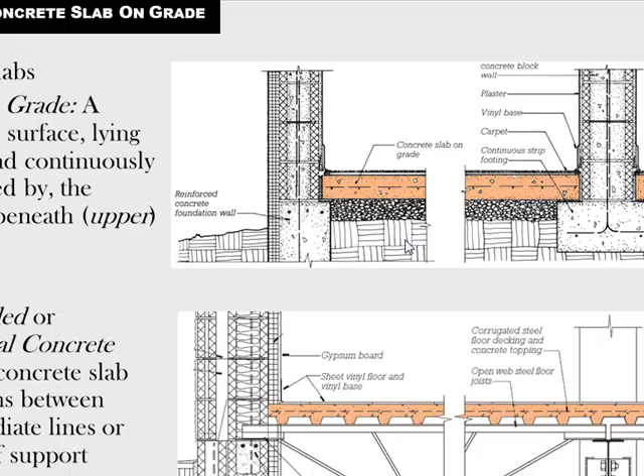We're continuing into concrete. This is talking about concrete slabs on grade, which is pouring the concrete in place. Here's some good details you could copy for extra credit, showing how a slab on grade is made. This is a section detail, meaning it's cutting through the wall vertically down into the ground. In it you see some concrete block here with some reinforcing bars. You have insulation on the outside, and your concrete foundation wall there. This symbol is the dirt or earth, like a parquet pattern. Usually above the earth you will have 4 inches of gravel.

What that does is allow any excess water to drain down away from the slab. Then you have your 4-inch concrete slab on grade that has the welded wire mesh inside, and your flooring on top of that. So this is an exterior foundation wall. This is an interior footing — it's a little shallower, but it supports an interior wall.

There's also suspended structural concrete slabs. This is another detail, probably similar to what we're standing on right here. You have a concrete masonry exterior wall, and some steel trusses holding up this floor. Then you have that corrugated metal concrete deck that you've seen pictures of before, and on that is a lightweight concrete flooring with some welded wire mesh in it. That's held up by a steel beam that's clipped to that column beyond.

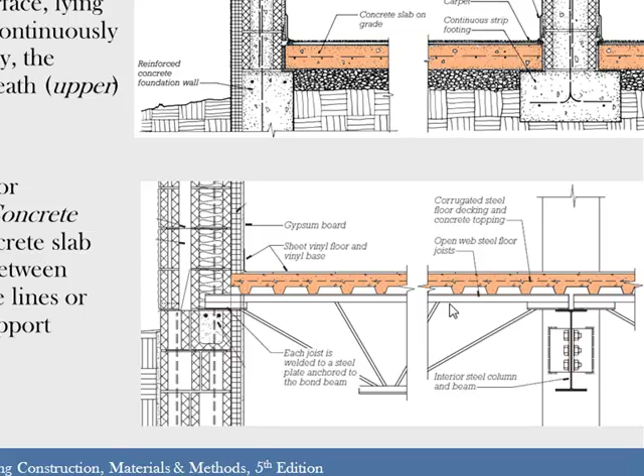The sign-in sheet's up here for those that just came in. So these are good details to study and redraw for extra credit. This slideshow is online, and plus those details are probably in the book.

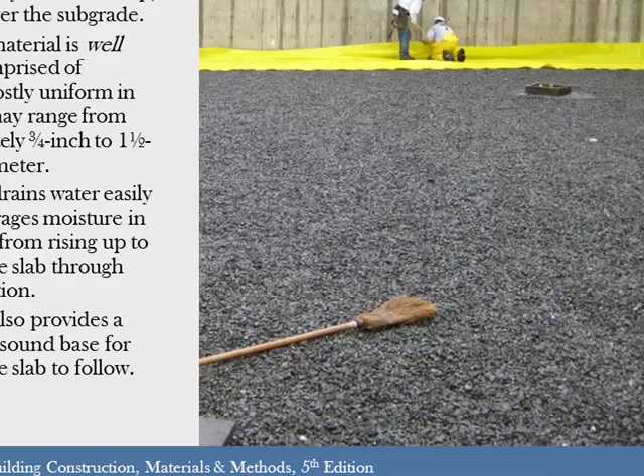So when you pour a slab on grade, you have to really prepare your site well. That's probably one of the most important factors — you actually have to dig out the existing dirt and then put in good dirt that's stable, that won't shrink and swell, then tamp it down and prepare for your concrete. Because if you just go out and pour on whatever's there, there's no telling what's underneath — it'll cave in, or it'll crack, shrink, and swell. So you really have to prepare the subgrade. The engineer will usually test the soil and tell you what you need to add. There's the rock I was just talking about — that's the 4-inch layer of gravel right here.

So there it is right there. Obviously that's a big piece of concrete they're fixing to lay, and there's the waterproofing membrane over there.

When you have edges on your slabs, or if they're running into another wall or building, you have to allow for some movement. So you need expansion joint material, usually some form of foam or rubber. Then on top of it, you'll have a sealant that will keep, hopefully, most stuff from falling down in there.

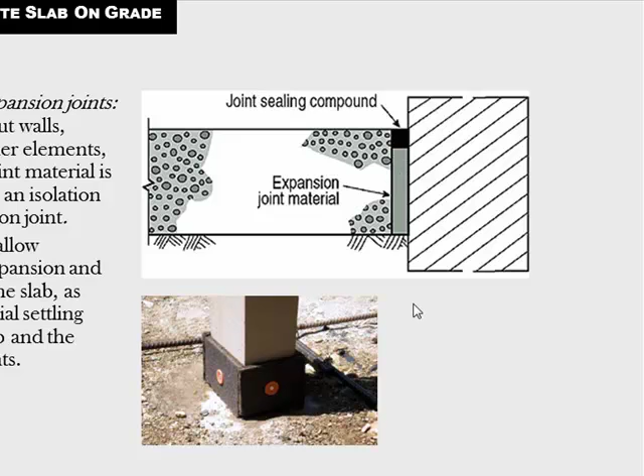You can see that's what it looks like. This is that cut looking down on that column. There's the column, and there's this expansion joint material around it. Then when the concrete's poured, they'll put a sealant over that, which is this right here.

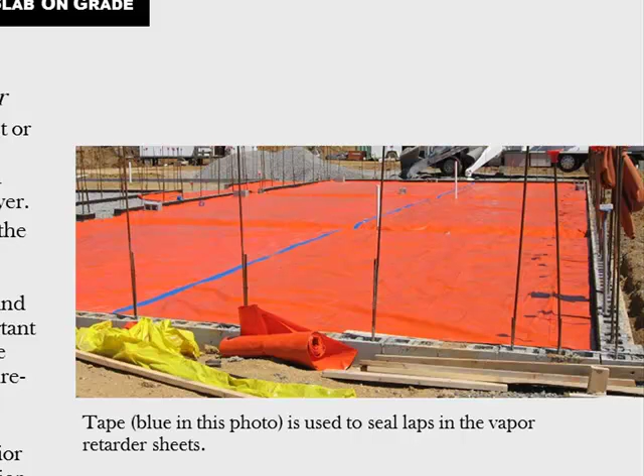Then you have a moisture barrier, which again is just another protection for moisture. It's hard to find pieces of plastic or this material so big, so you have to seal the joints in that, and it's got to be done precisely. Depending on whether it's just vapor or actual moisture, and the level you need, is how you will seal it.

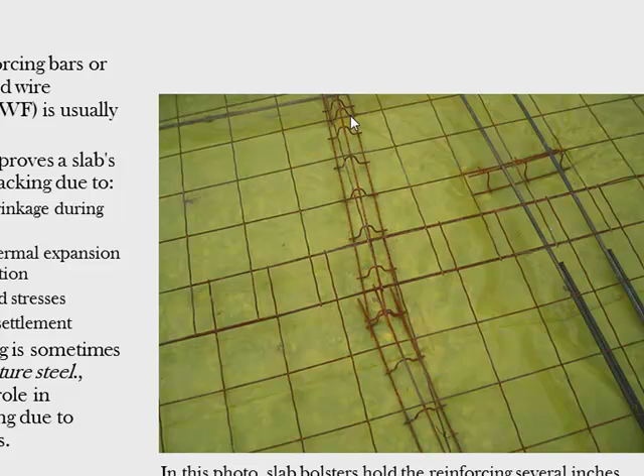Here's a picture of the welded wire fabric that's typically in driveways, thin slabs, and sidewalks. That's instead of rebar. Well, there's a little rebar there too, but see how that goes down a little, that's like a little beam. The 4-inch thickness just has the welded wire fabric, and these little things here are called chairs, so it sits up in the middle.

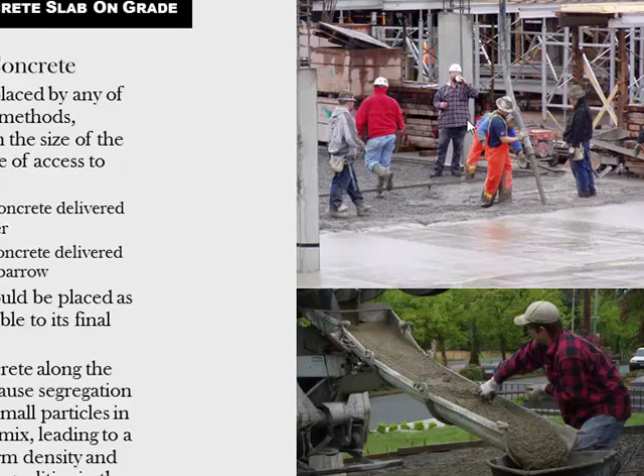Here they're pouring the concrete. Again, I told you last week, you want to pour it as close as you can to where it's going to be, so that it doesn't segregate. Here the dump truck is pouring it close to the driveway.

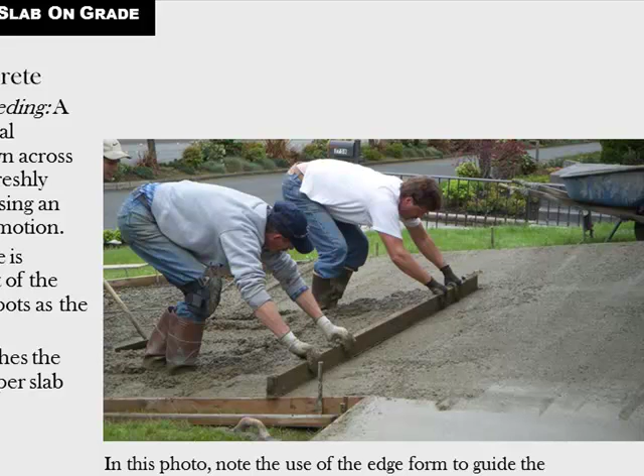Then you've got to strike it off, or screed it. In this case they're just using a board because this is a small application. Notice they have a bulge of concrete in front of that, which keeps filling in any air pockets there might be.

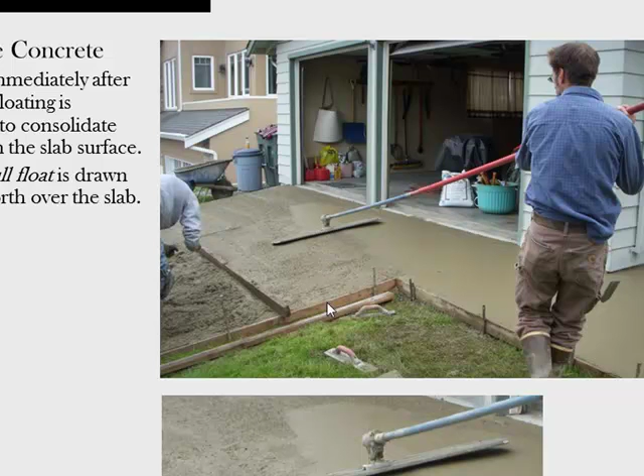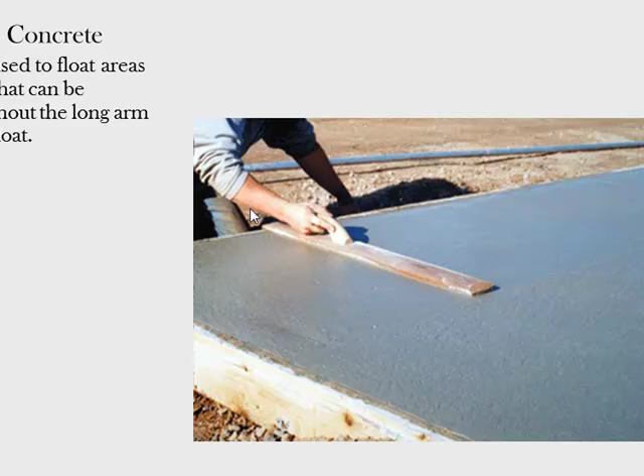Then you've got to float it. That helps consolidate it further. This is called a bull float, what he's using. In larger slabs, you'll have a mechanical type float. Then you've got a Darby to float areas of the slab you can't reach with the long arm.

Then you want to finish your edge. You don't want your edge to look like that. You want it to be nice and smooth, so you come along with a tool to finish it in whatever shape you want.

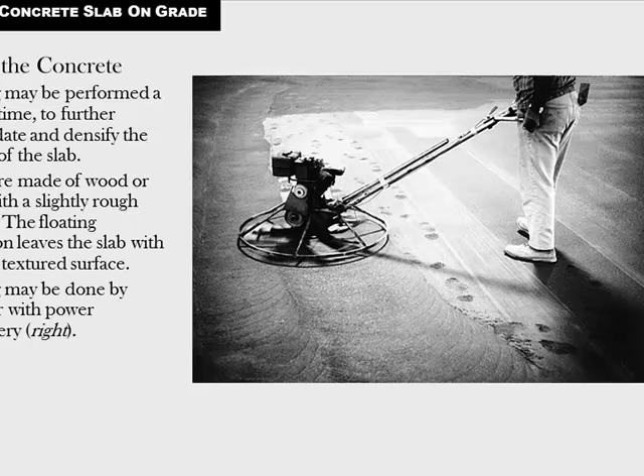Here's a mechanical floating machine. See, it doesn't take long for you to be able to just stand on it. This concrete is only a couple hours old. They really have to work fast to get all the finishing done before it sets up too hard.

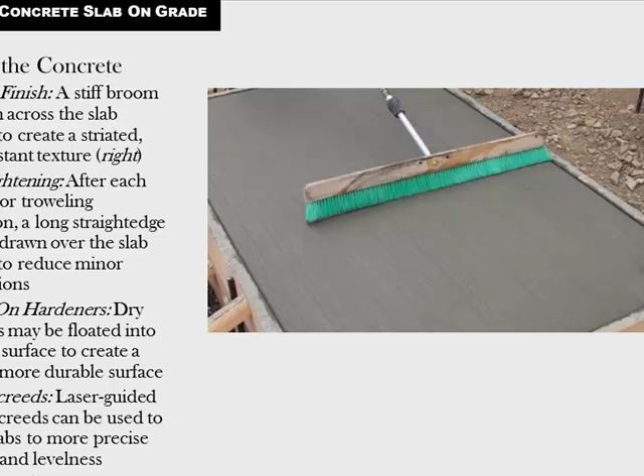Troweling for a smoother finish is used sometimes. Then, like on sidewalks and driveways where you don't want to slip, you'll have a broom finish, and that's what it is. You just strike a broom across it. There are also other things you can add, mixtures or things, if you need different finishes.

Curing, remember it took like 28 days to reach the maximum level. We saw that last week. So to cure it, it also has to be kept damp, and not too cold or too hot. Here they're covering the slab, maybe to keep it from evaporating or even keep rain off of it.

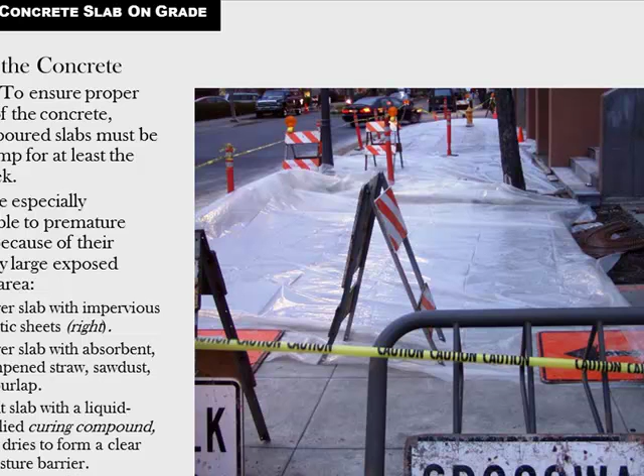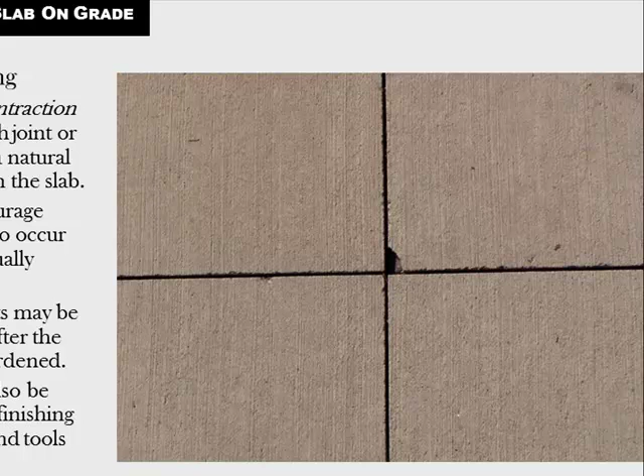See, they should have extended that joint. They should have kept going because the crack kept going. Here's the rule of thumb: control joints, which don't go all the way through, just a little groove, should be spaced 24 to 30 times the depth of the slab. So if you have a 4-inch slab, that's 24 times 4, almost 100 inches apart, 96 or 98 inches, which is 8 feet, at least.

This is an expansion joint. It goes all the way through, and that allows for movement in the concrete. It has that rubber around it, and then it's got this material on top.

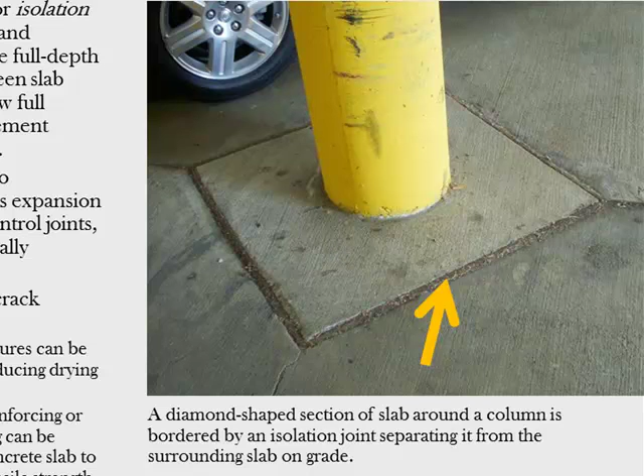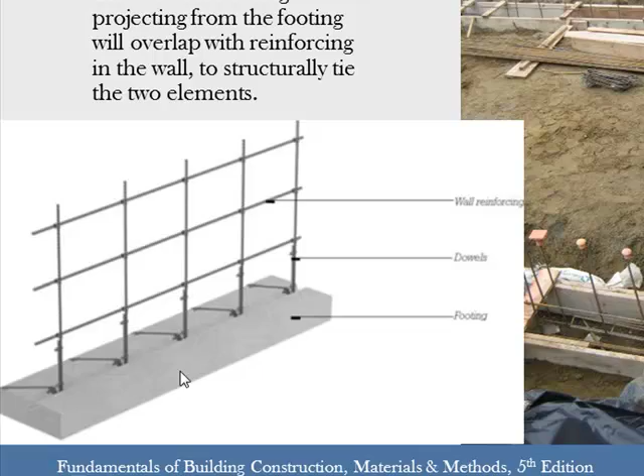So then we get to casting a concrete wall. First, you're going to have your footing. You can see a diagram over here. Remember, a footing is not a foundation wall. It's inside. Way back at the beginning of the slideshow, you saw the footing.

Let me see if I can find that. Oh, it's not going to go back. Never mind.

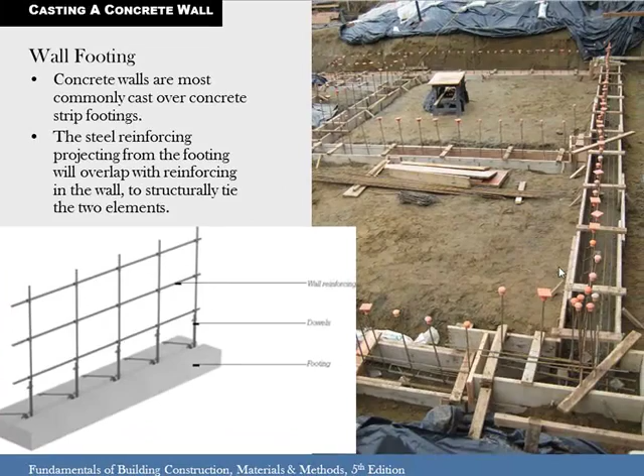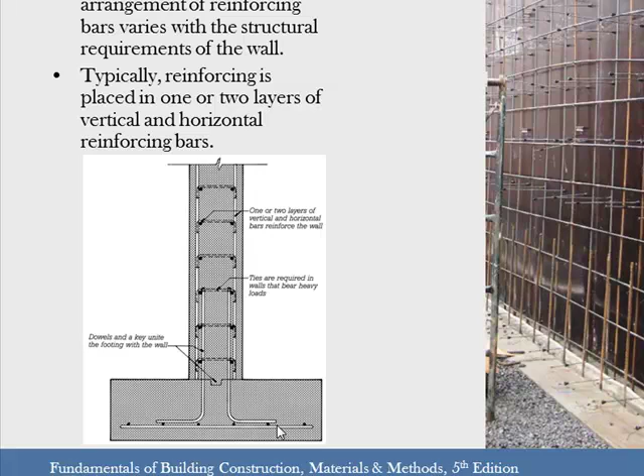So they have the rebar that's coming up that they placed in the footing when they poured it, and then they'll tie it into the wall that's going to be on top of that. Here you can see this is a detail of that. You've got some bars on the bottom going both ways. That's coming towards you, that's going parallel. Then it's tied to these bars that stick up into the wall. That's this right here. Can you see that? Then the wall itself has bars in it that will tie. So all of this, once it's done, will be a solid piece of concrete.

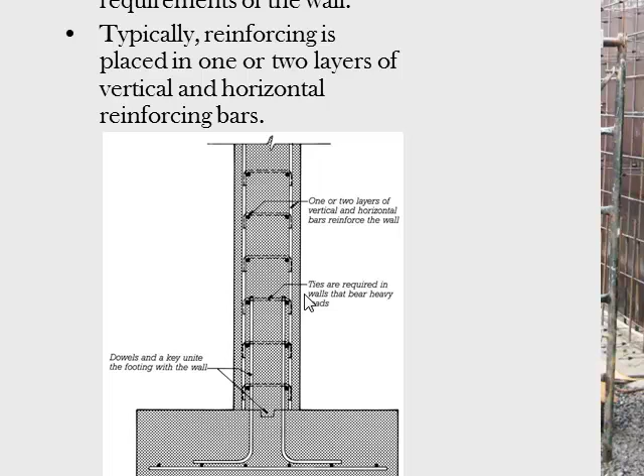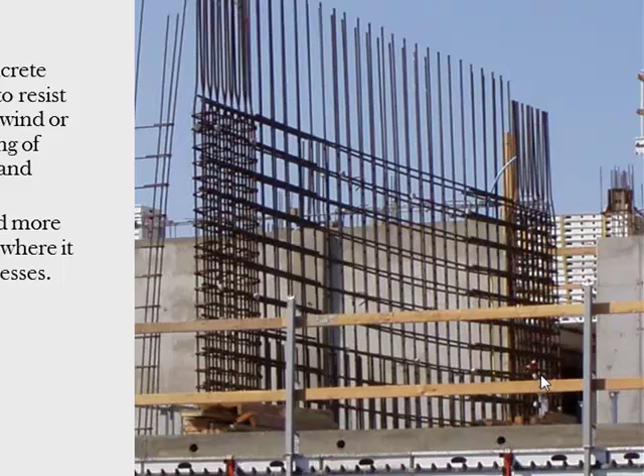So here they're designing this wall for shear, which is lateral forces such as wind or earthquake, to keep it from sliding against one another. There's going to be more shear force on either end. So that's why there's more bars on either end, and then it thins out in the middle.

Here's some shear walls for a high rise. This is the bottom floor. Lots of steel in that. And this is when you've got to be careful. Last week we discussed the aggregate, and your aggregate has to be able to fall down between these bars when they pour the concrete. So it can only be a certain size.

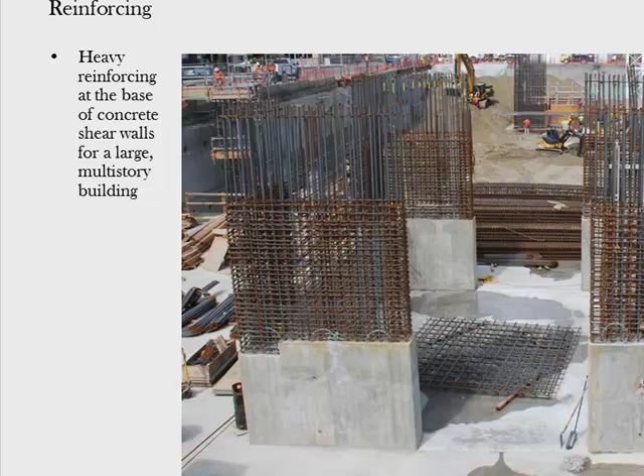Also, one thing to remember is that your concrete's going to look like your formwork when you take the formwork off. So if it's not ever going to be seen, you don't have to take too much care. But if it's going to be an exposed concrete wall, you want nice, smooth formwork, because when you take that off, you'll see the wood grains. Sometimes you want that, sometimes you don't. So it's important to understand what the concrete's going to look like once you take that off.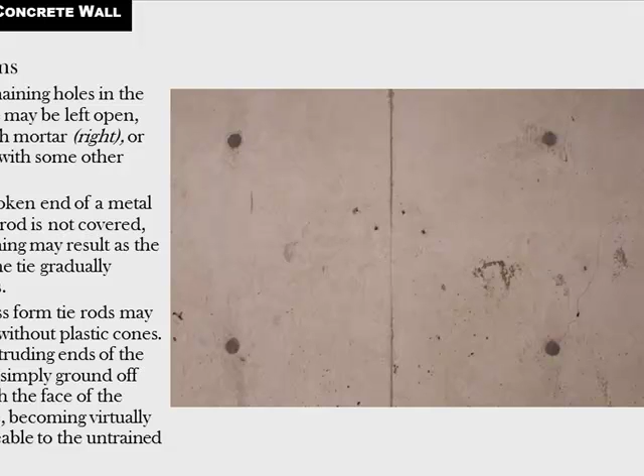Here they've filled it. You can see the broken end of the metal. But see how the concrete will pick up every little scratch and indentation on that formwork. So you want it to be nice. You want it to look like what you want it to look like.

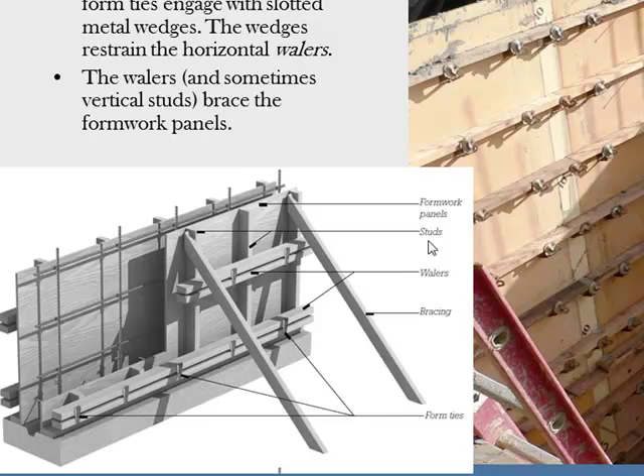Okay, this is another wall form. It's got walers on it. That's what these are right here, these horizontal pieces. Then you've got the panels. Then you've got bracing to hold that up, because it's very heavy when they pour it in there. So they've got to have a lot of formwork. The most expensive part of concrete is getting the formwork right.

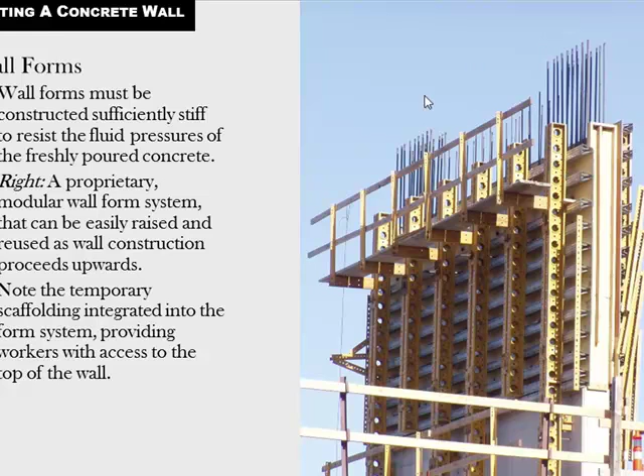Here's another type of formwork that will keep climbing up the wall as they pour it. This is probably going to be a multi-story wall, and they can just keep jacking it up. They'll pour like 4 or 5 feet, let it cure, then crank that up, and then pour another 4 or 5 feet. See how heavily this is braced for this tall wall.

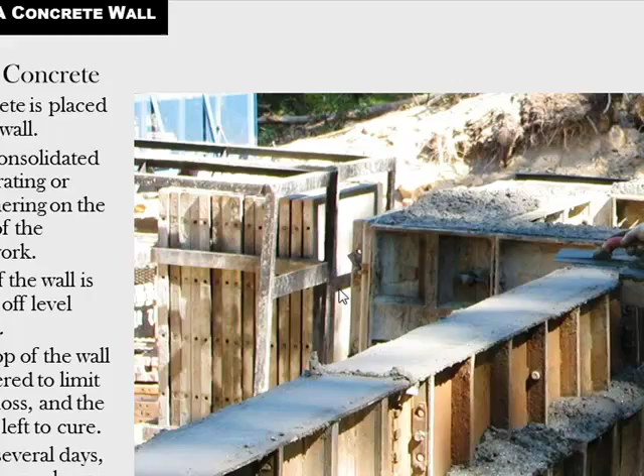Remember when you saw the slab pouring last week and they had the vibrators? You have to do that in a wall too, because you don't want any pockets of bad concrete down below. So they have to finish it off, similar to what they do on a flat slab, and make sure it's all solid, nothing weak, and everything fills in.

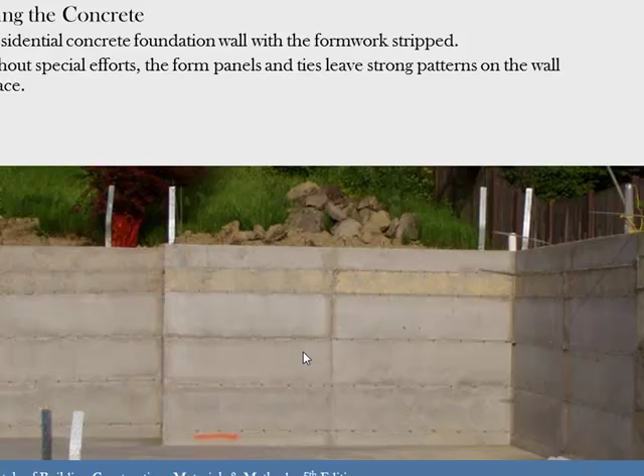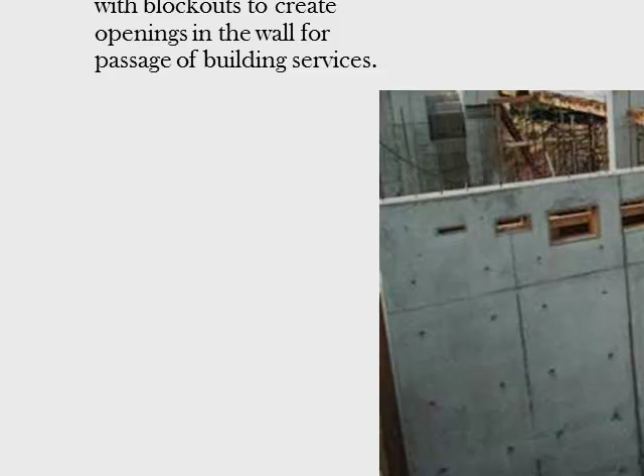Here you can see after they took off the formwork, you can see everything that was there. Sometimes that's okay, sometimes it's not, depending if you're going to cover it with stucco or brick or whatever. Sometimes you want to see a wood pattern. You can design your formwork and then take it off, and your concrete looks like wood and you paint it. So there's another example of what it looks like. And they have these block outs for probably ductwork or electrical wires here.

Here they didn't do such a good job vibrating it so it all filled in, because you can see a big, that's not right. And depending on, like I said, whether it's going to be exposed, or if this is really bad, the structural engineer may say tear it down, do it again, because that's going to affect the structure of the building. I don't think this necessarily would. That's more cosmetic, but sometimes it can. Like that, that's not good. The engineer would probably say, saw that out and re-pour that little section, make it smooth.

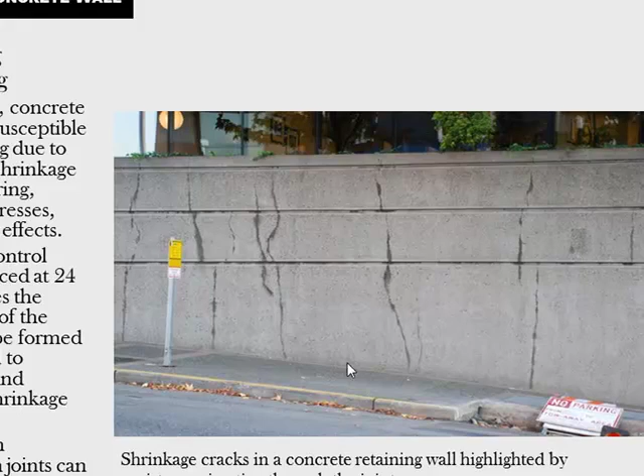And here again, they want to control the cracking. So you need some vertical control joints, 24 to 30 times the thickness of the wall. You also need full depth expansion joints every so often. You can see this is a retaining wall, which basically holds dirt on the other side. So the moisture from that dirt is coming through these little tiny cracks.

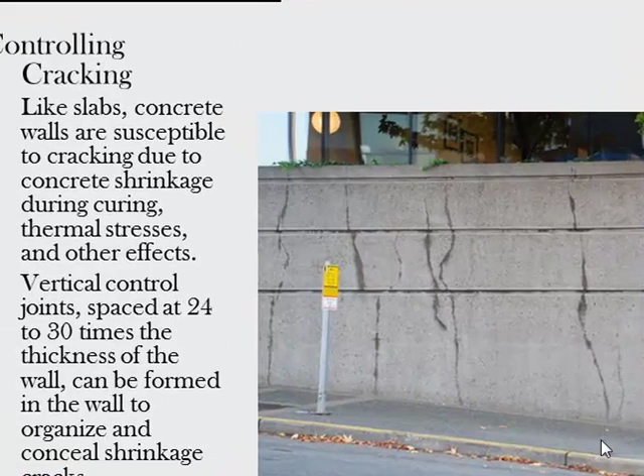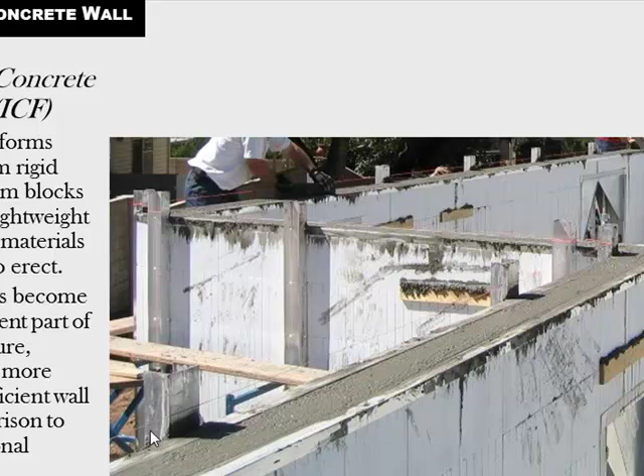This is a new material that more and more people are starting to use called ICF. It's basically styrofoam concrete blocks, and then they come in and fill it with concrete. It has very good insulating value, and if you use it on houses, you'll want to try to get most of your plumbing in the beginning, but you can groove out this styrofoam and run wires and things like that after you've poured the wall.

And there's several houses like this out on the island that are recently built, and it's very good for hurricanes, stuff like that. Those houses will be there when the rest are blown away. There's a condo out there, in the gated community. I don't know what street it was on, but it's built like this. Oh yeah? A condo or a house? It's a complex, it's a condominium. Oh, and the whole complex is that way. The complex is built like this. Huh.

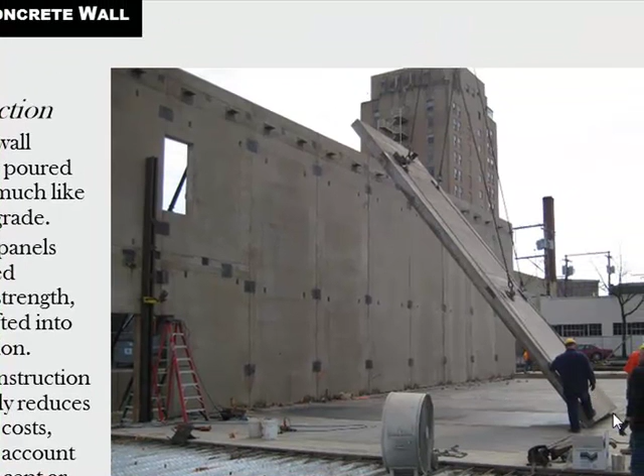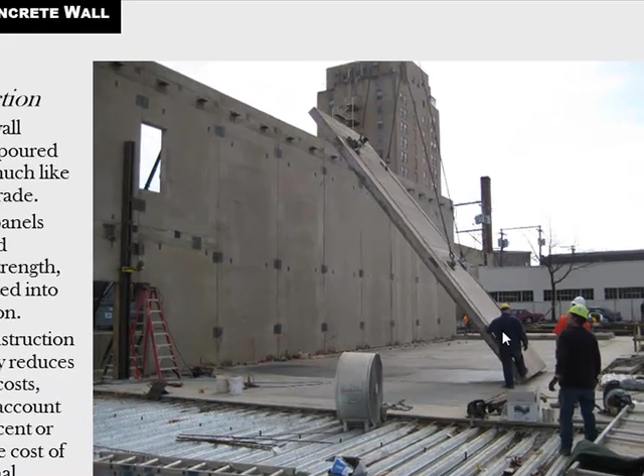Here's tilt-up construction. It's tilted up, hence the name. They pour it flat. You can see it's easier to pour concrete on a flat surface. You obviously have less form work involved because you pour your bottom slab and that's already a form. Then you can just pour this, and then when it's cured, you tilt it up. It's a pretty economical way to go for certain types of buildings.

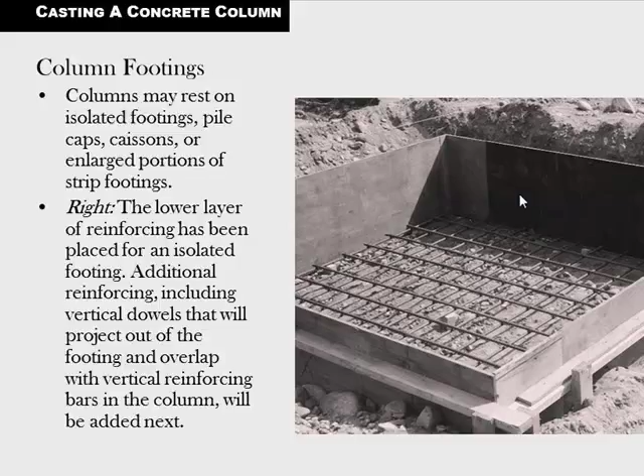So columns, which are a big part of skyscrapers. Columns may rest on isolated footings, pile caps, which we studied way back in the first class, caissons and enlarged portions of strip footings. This is the lower layer of reinforcing that has been placed for this isolated footing where they're going to be putting a column.

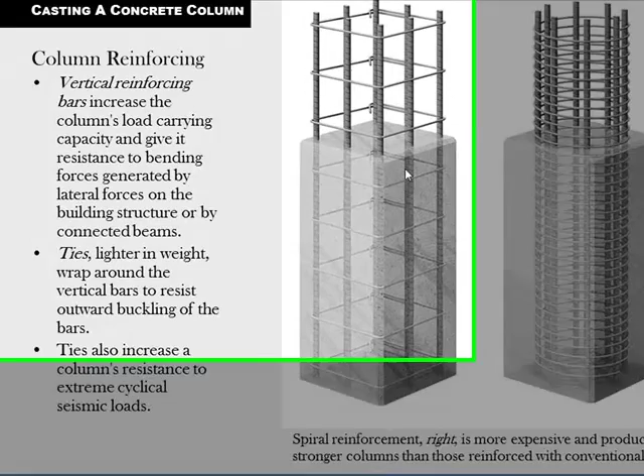Here's kind of what a column reinforcing looks like. You can do it square or circular. The outside of the column is not going to look any different. Just depends what the engineer wants. So you got your main bars going up, whatever they call for, and then you got your ties that hold them together until it's all said and done. Or you can do a circular pattern with spiral ties.

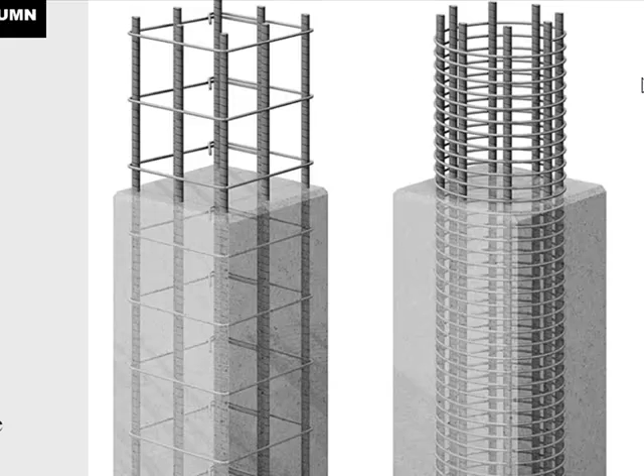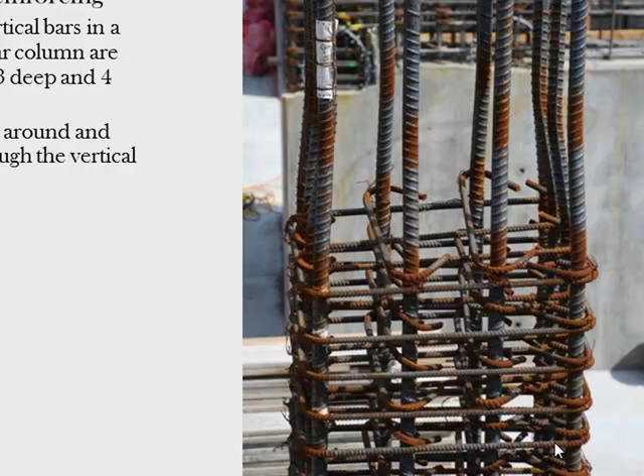Here's some details looking down and different types of patterns you could use for reinforcing. Different numbers of bars. There's a lot of metal. You're going to have some small aggregate to be able to fall down through that. And you can notice that as it goes up, the vertical bars are bent inward so that the next section can be nested with that, and the dimension won't change on the outside.

Here's some prefab reinforcing that was done in a shop and delivered to the site. It's probably easier to do that kind of work in a shop if you can, then just connect it all together at the site. So you can see how the bars are bent inward there so that they can nest easier.

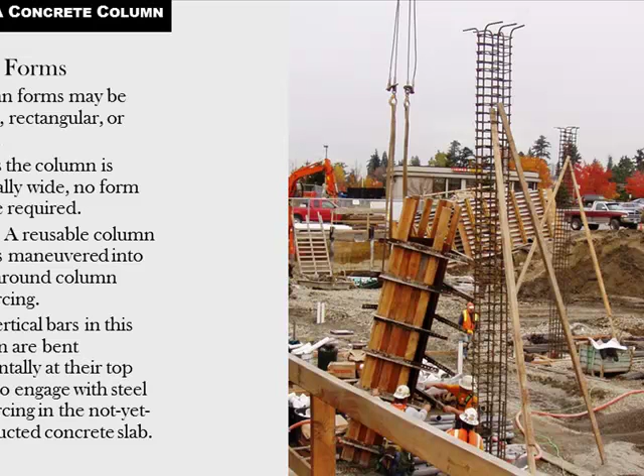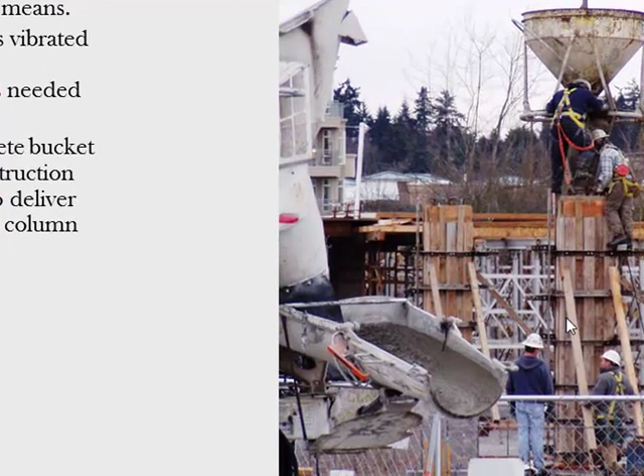Column forms, same thing. Your column's going to look like your form. So depending on how you want it to look, your form work needs to be pristine, or it can be sloppy if you're not going to see it, I guess. Then they take the concrete in a bucket and they drop it in there as close to the position as possible. You don't want to drop it too far, or you get the segregation problem.

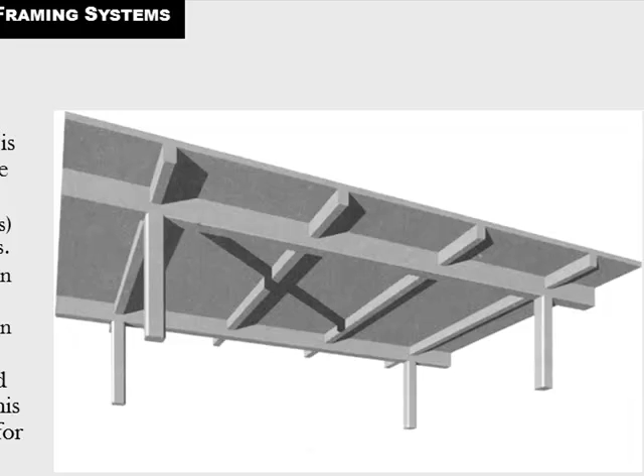So these are the different types of slabs, and it's kind of important to understand this, and it talks about it in detail in the book. One-way solid slab: the slab is reinforced to span one direction only. The girders, which are the deepest beams, which would be these, span between the columns. So you've got columns, then the girders rest on the columns, then the beams, these are the beams right here, they rest on the girders, and then the slab is poured between the beams.

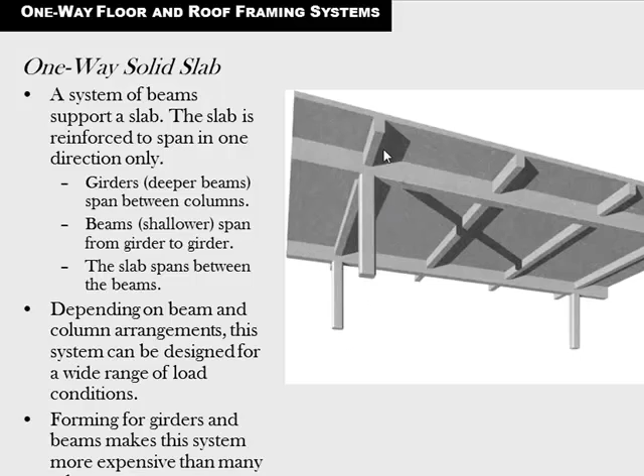So the slab is relatively thin. And this is called a one-way solid slab. All of this is not necessarily poured at the same time, but it's interconnected with its reinforcing. So the one way is you've got your columns, girders, and then the beams, and then the slab. And the reinforcing in the slab will primarily run from beam to beam. That's why it's one way, because it's going to be going that way.

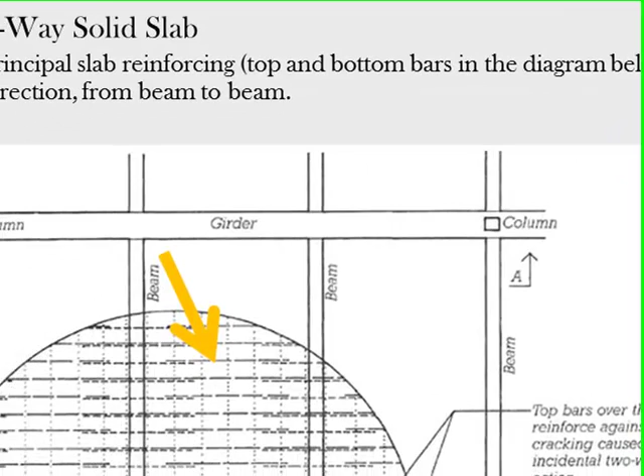Here's a look at it, kind of a cut through looking from above. You can see the reinforcing, like I said, is running from beam to beam. The beams rest on the girders, which rest on the columns. And then we have a rib slab, which is a one-way concrete joist rib slab. You have a system of beams and slender, closely spaced ribs that support a one-way slab. So here you have columns and beams and then ribs.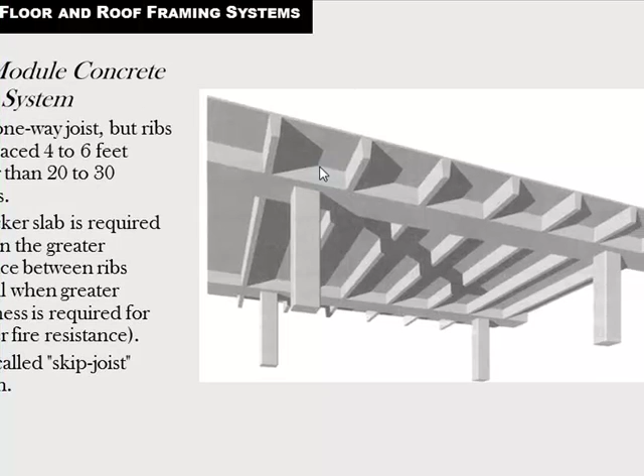So from one way you go to two-way. Two-way means that the reinforcing will run both ways. Two-way framing systems: a two-way slab is reinforced so that it spans structurally in both directions. Two-way slabs are more structurally efficient than one-way slabs of the same thickness. Two-way slabs must span roughly the same distance in both directions. As the layout of the slab supports becomes increasingly rectangular, the efficiency of a two-way slab decreases. So two-way slabs are better if they're more square.

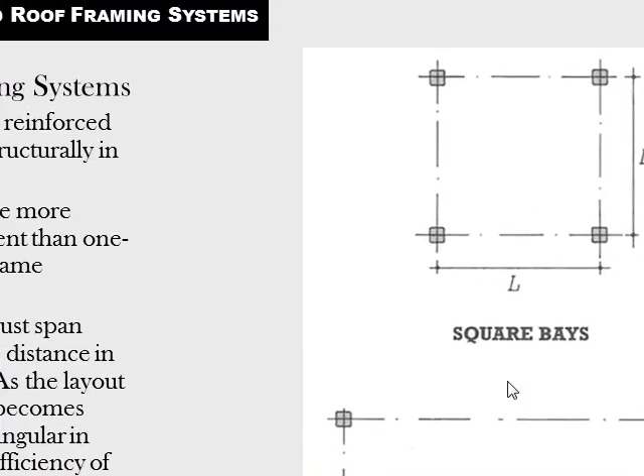They're a little bit more efficient. And you see that a lot in parking garages. That's a two-way system. Here you can see it, it's kind of square. You've got your columns and your beams are evenly spaced, and then your slab is on top of that.

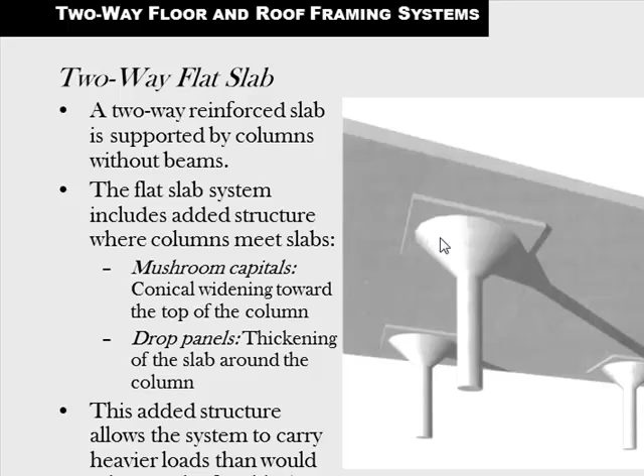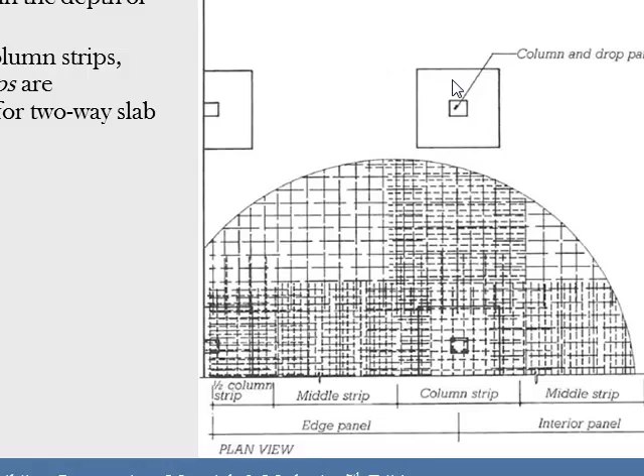You've got a two-way flat slab, which is a reinforced slab supported by columns without beams, but the tops of the columns are kind of mushroomed out to support, and there's a lot of reinforcing, which I think you'll see in a second, over this area, and then it thins out in this area. Yes, you can see it there. So this is the mushroomed out part. There's a lot of reinforcing in the slab, which takes the place of those beams before. And then there's not as much there. There's a parking garage.

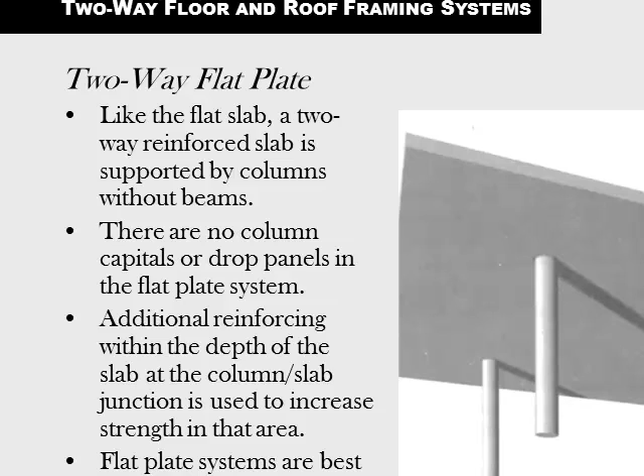Two-way flat plate. Supported by columns without beams. There are no column capitals or drop panels in the flat plate system. Additional reinforcing within the depth of the slab at the column slab junction is used to increase strength in that area. Flat plate systems are better suited to lighter loads than flat slab systems. So this might just be a roof or something that nobody's really going to be driving or walking on.

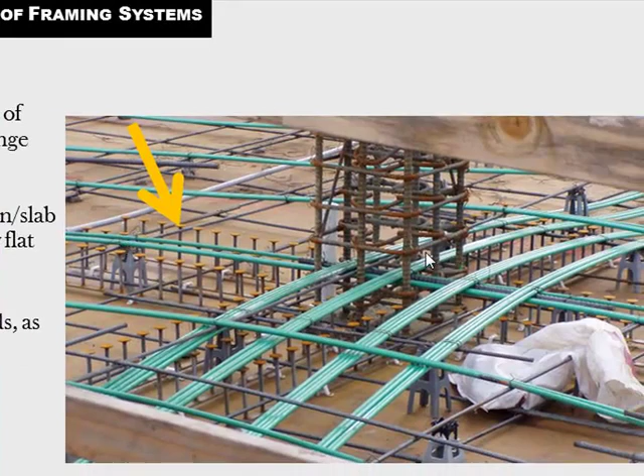Here they're getting ready to reinforce a two-way flat plate system. These are called studs that increase the strength, and then the green cables are going to be post-tensioning. They're going to pull those real tight after they pour the concrete, and then after it's cured, they're going to cut them off and they're going to kind of spring back into place, and that makes the whole thing very rigid.

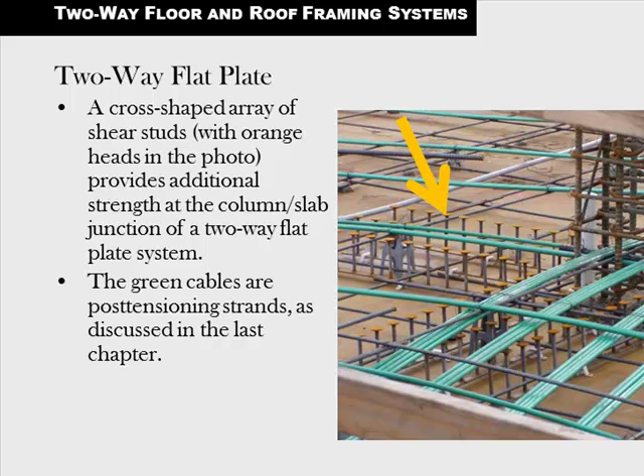Here they're doing a two-way flat plate system. Again, condos might be a good use for this, where there's not concentrated heavy loads.

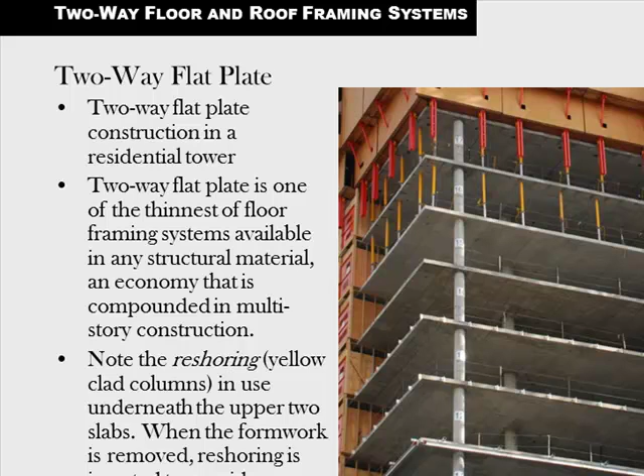Okay, so any questions on chapter 14? Lovely, lovely concrete.

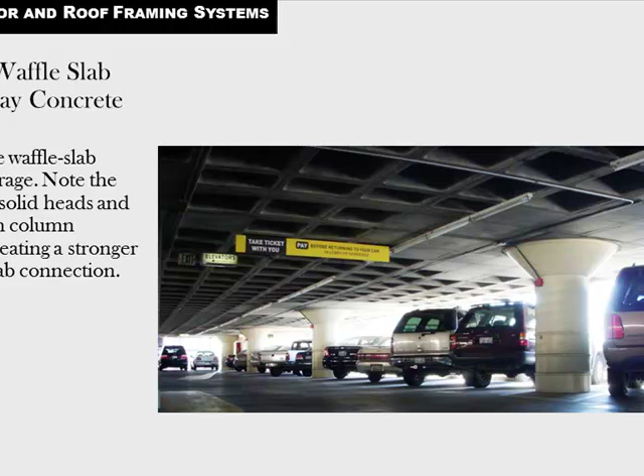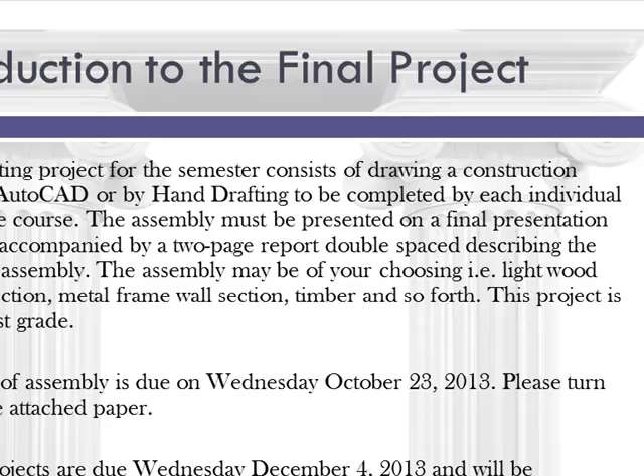Okay, I want to talk right now about the final project, and this is something you can work on next week too. I'm one to believe that you should never wait till the last minute, so I like to give these things out early. And we'll go over this. The final project counts for a test grade. It'll be due the last day of class, and you will present it.

Do you want one for your brother?

Okay, so I'm going to go over this in depth just so there's no misunderstandings. You can ask me questions. The culminating project for the semester consists of drawing a construction assembly in AutoCAD, if you're familiar with that, or by hand. Everybody's got to do their own projects. It's not a group work. The assembly must be presented in a final presentation drawing, meaning I want it to be neat, not just on torn out notebook paper. I want it like a report.

Final presentation drawing, accompanied by a 2-page report, double-spaced, describing the construction assembly.

The assembly may be of your choosing. For instance, you can do a wood frame construction, a wall section of a wood frame construction house. You can do concrete block, you can do heavy timber. Anything that we've studied that interests you. So you're going to really study that type of construction and how it goes together, and your report will describe to me all the bits and pieces of your wall and why they're there. Like why it may have a vapor retarder, why the brick is here, why there's a finish on the inside.

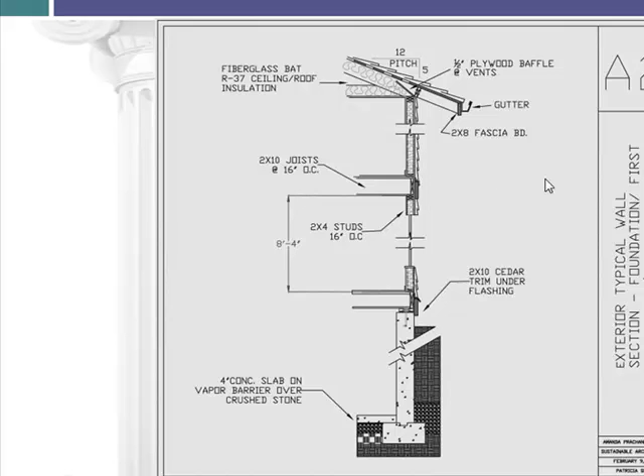Let's see what else. Here's a better picture of that wood section. You don't necessarily have to have 2 floors, it might just be 1 floor, but it shows pretty much everything involved in that. In addition to what's here, I would want some vertical dimensions. There's the other one - this one has dimensions of where, like the top of the slab, if you have a window, where the window is, where the ceiling might be, where the roof starts. Okay, that's that.

Is there any questions on that? What is the last day of class, do you know the date? It's Wednesday, December 4th. And then we have a final the following week, which I think is on Monday the 9th, the last time I looked at the schedule. Last time, and I might do this time, it might be a take-home final or an online final where you don't really have to come that day, but it would be due by that day.

I don't know if I put this on here, on my schedule I don't think I put it on there. On Monday, November 25th - did I put that on here? You need to write this down because I didn't. Monday, November 25th, I want to see a draft of your final project, just so that I know you're not totally waiting until the last minute. Yes, it's on your syllabus schedule, and it's probably on Canvas. It's on this sheet of paper.

Got a question? I wasn't sure what to do. I guess what we're doing here is basically drawing one of these, but to scale. Yes, you're going to pick a wall type. Let me turn this recording off. How big would it be, anything off your book? Any wall.